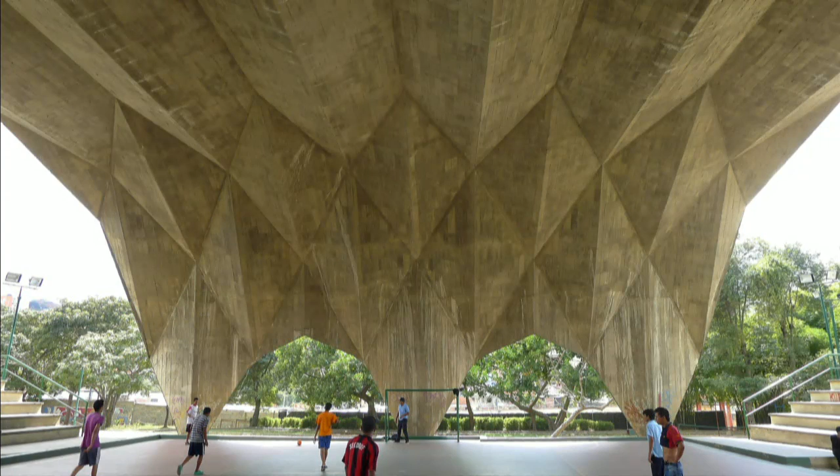So, that was my title for today. It actually comes from a very particular experience we got involved with.

Richard got a visit from the ex-mayor of London, Ken Livingstone, who said, you have to go over to Caracas. And Richard's sort of in the business of, any difficult project, pass it over to me. He said, you've got to go over to Caracas. So I went over to Caracas and met the mayor.

That's Caracas. That's the coast where you land at the top. You can see the airport, Maiquetía. And then you've got this incredible range of mountains that goes to, I think, 2,000 meters plus. So you drive up this extraordinary highway, and then you drop down into this chaotic city where 70% of the population are living in informal settlements. And the biggest ones have 900,000 people living on a hill.

And we went to see the mayor, and he had this idea. He wanted us to build a bus station. Seemed fine—they needed a bus station.

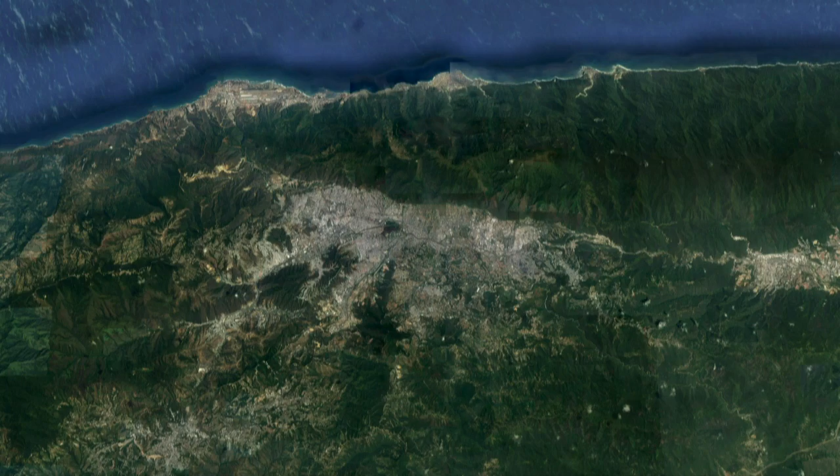The full story is, as we were leaving, having talked about it a little, he said, well, I'm just off to a meeting, one of the Chavista kind of meetings. I said I'd like to go. He said that's fine, but we're going by motorcycle. I said I had a scooter in Madrid, thought that's fine too.

Although the engineer I was with had never been on a motorcycle in his life. But you don't drive it, you ride piggyback—as they say in Spanish, like a packet. You arrive on behind the driver.

So we went off to this meeting, into this enormous auditorium they were about to renovate by Villanueva, up in a neighborhood called the 23rd of January, a sort of Le Corbusian development. I had a tie on and a suit, and I quickly realized walking in—it's all women, just about, all in red t-shirts with that fist symbol on them. I was trying to get my tie off and slip it into my pocket.

The meeting ended—this has nothing to do with the lecture, by the way—with the mayor doing a fantastic, impassioned, very articulate speech about the power of urbanism, and presenting us in the front row: 'these gentlemen, estes señores, are here to help us improve Caracas.'

And then they all get up and start singing, and it's 'hasta la muerte'—to the death. I turned to the engineer, who was Spanish, and said, look, don't worry, that bit, the hasta la muerte, is not in the contract.

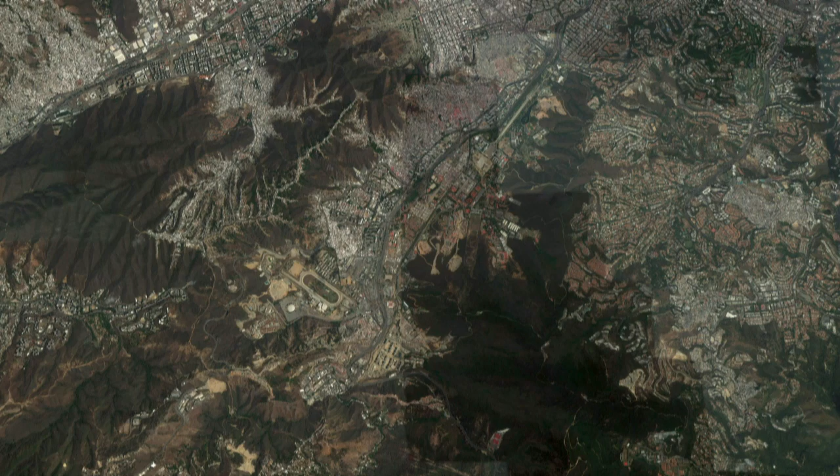So we drove out and looked around and said, well, you can put the bus station anywhere here, anywhere in this area. And there you can see the existing structures.

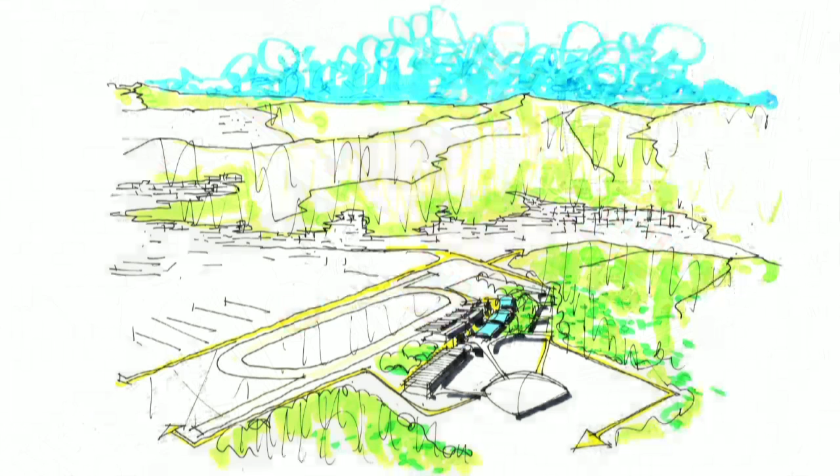We went back with a sketch—this isn't the sketch, I haven't quite found it, but it's very similar—where we did a quick sketch and said, listen, we can put the bus station here, but what we think you should do is make a park, protect this green space, because in 20 or 50 years this will be a major important park for the city, because by and large it's avoided invasion. The mayor took this and apparently went to Chavez. There's absolutely—we can talk about the politics in a little while, it's worth talking about—but apparently the message that came back was, yes, we must protect the views of the sky in the sketch. I'm thinking, crikey, either that's really clever, or completely crazy.

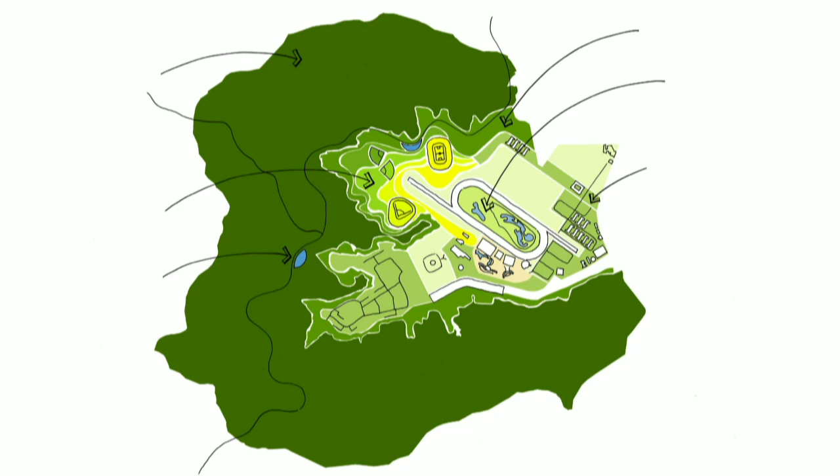So we developed a master plan which was like a series of almost orange skins, where we protected the hillsides up to the ridge line—doing almost nothing up there—and then as you got closer and closer to the centre, there were more and more interventions.

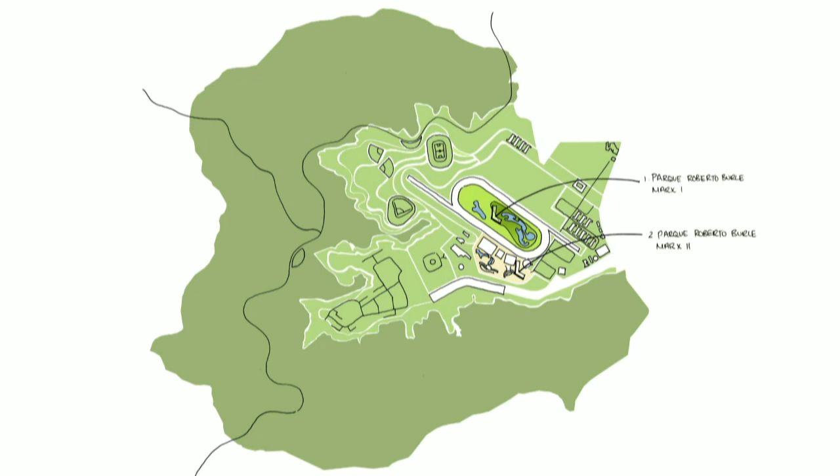Basically, a series of drawings, series of presentations, where we situated the bus station. They later wanted some stadiums, and picking up on the local political jargon, we described it as 3 axes - education, sport, and transportation, los tres ejes. The idea was the bus station met at the intersection of those 3 things.

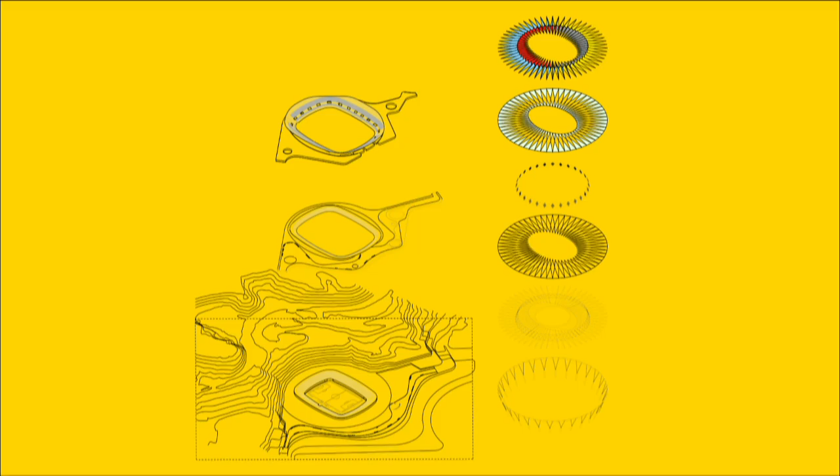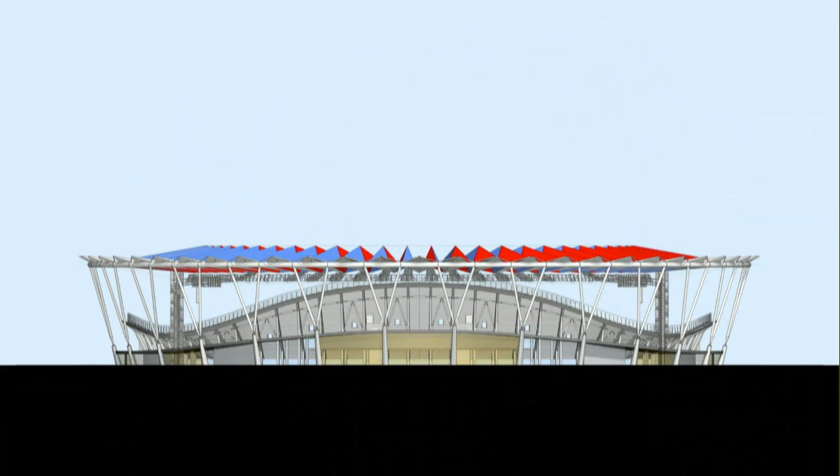Along the way, they asked us to do a football stadium, which we did - a very beautiful football stadium with a roof inspired by local artists. And that's just some of the drawings and models of that.

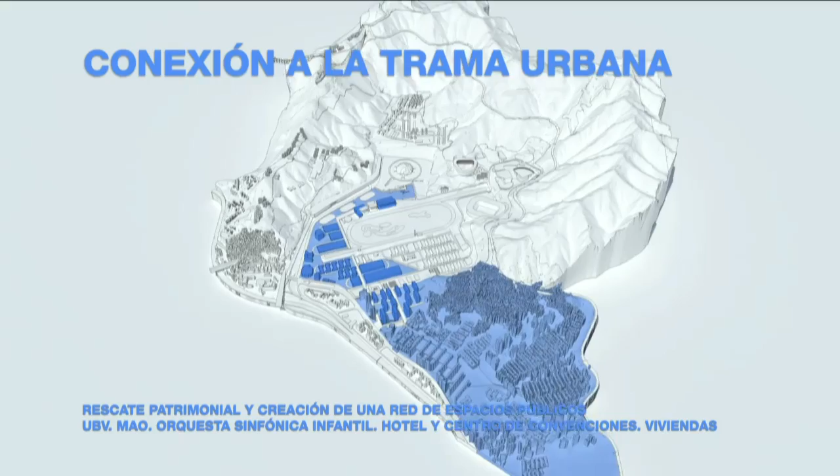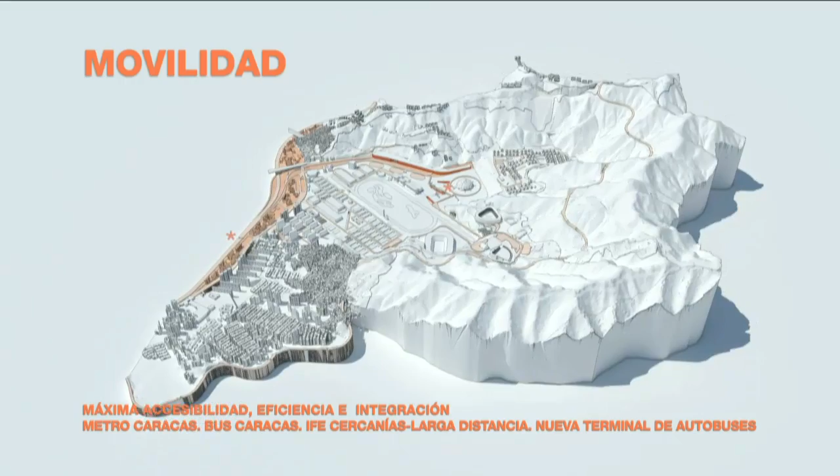This is a little video we did to describe those components. That was the educational axis, which is all the blue buildings, where they were converting a lot of the buildings they built for the race course to educational uses. They've got a kind of equivalent of Open University.

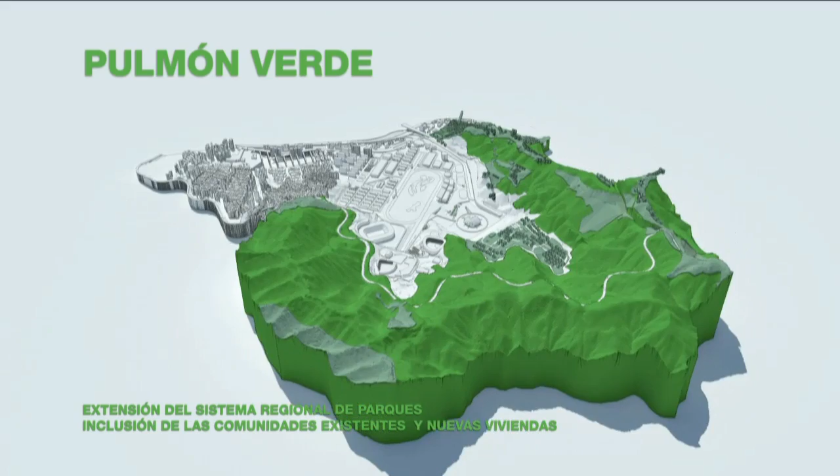Protecting the green space, because obviously the topography is pretty spectacular. Anyway, I'll go on to the next slide, and then I'll explain this video when we've finished.

I'm sorry about the resolution, but the music - I have a better resolution if it doesn't have the music, and I prefer the music to better resolution.

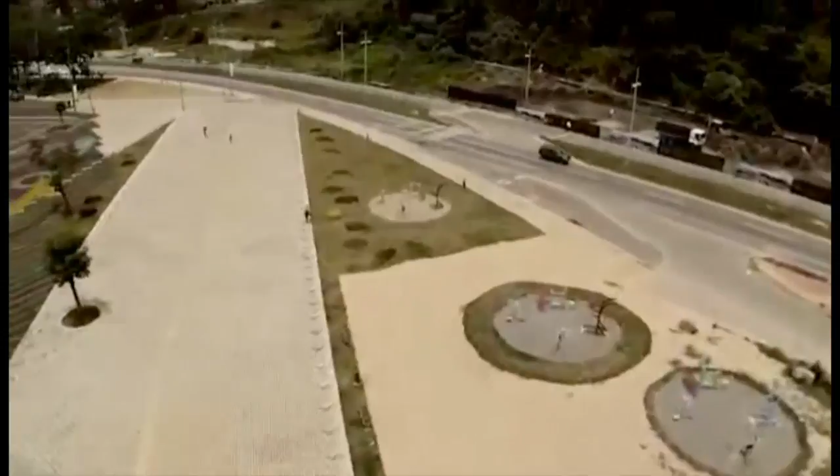I should say, any emails I ever send out from the office, I never put the words Hugo Chavez on, knowing that Homeland Security will forever forbid me from entering the US.

It doesn't seem much, that video, nor do these photographs seem very much.

But when we got these videos - because in the interim, the Venezuelan economy has obviously gone horribly wrong, Chavez had died, Maduro had come with all the consequences that seem to have flowed from that - and we weren't working on the project anymore. But when we got these pictures as a team, people were almost crying, because the project was very ambitious. We thought it was fantastic in many ways.

But it seemed to us that what they'd done meant more than many other urban design projects we'd achieved, because they'd taken the master plan and just gone on and got on with bits. So the pictures you see, for example, of the plants, are actually nurseries they've established up in the poor neighborhoods - given the power to the women, and they've grown the plants, and taken the children and planted the plants down in the park.

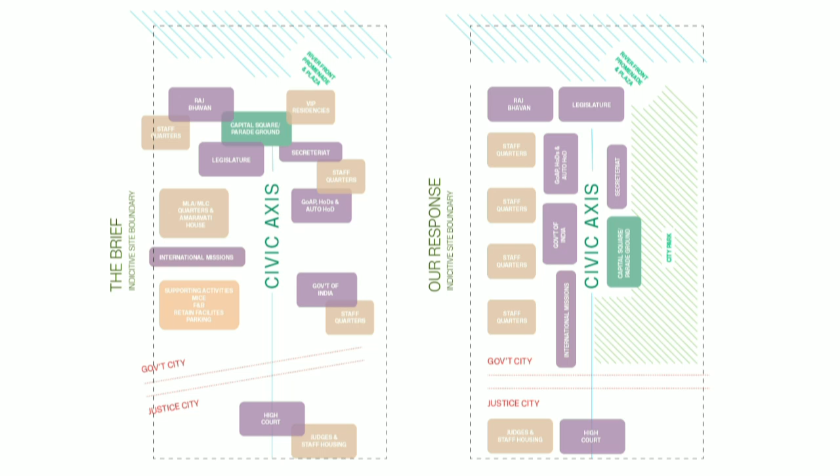Our first move was to say, well, we're going to get rid of that kind of imperialist nonsense, and we're going to make it asymmetrical, putting the buildings on one side and a public space on the other. So you immediately create two things: an accessible space, which rather than an internalized park only for people involved in government, but also becomes a public park. And you start to address this question of how you make the Indian democratic process as transparent and inclusive as possible. That was a theme running through all of this.

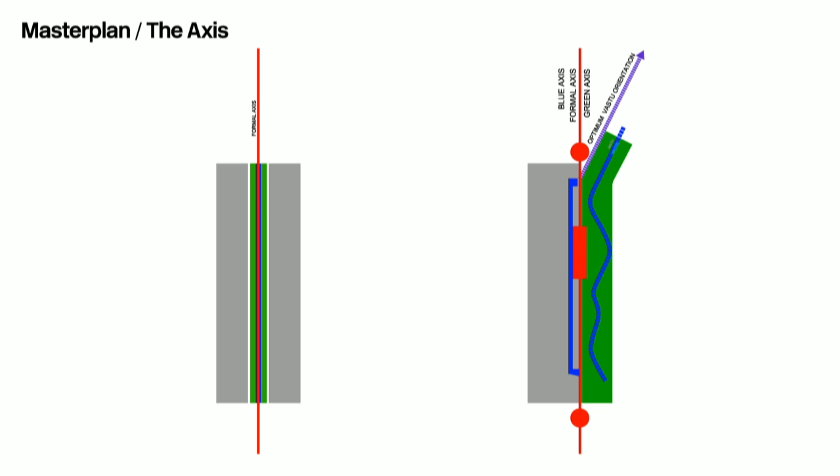So that was the basic master plan. There are some interesting symbolic issues we had to address, to do with religious symbolism of axes and so on. As I say, you're always working to a different set of rules. But in a sense, that was the master plan.

This sat in a slightly strange master plan. That was the master plan for this government complex, which itself sat within a wider master plan for a whole new city, much like Chandigarh was an entirely new city. What's interesting for us is the inheritance of the Raj, that all of those buildings you can see on the right are either the three key symbolic buildings, the administrative buildings, or the housing. It's in itself a huge construction project, and as you can see, it sits on the edge of a rather beautiful river.

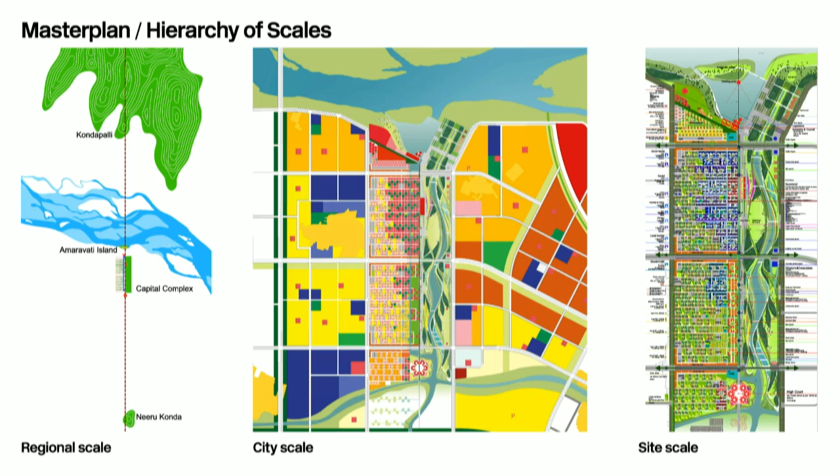So I'll just flash through these, but you can see from the titles the sort of general direction we were going.

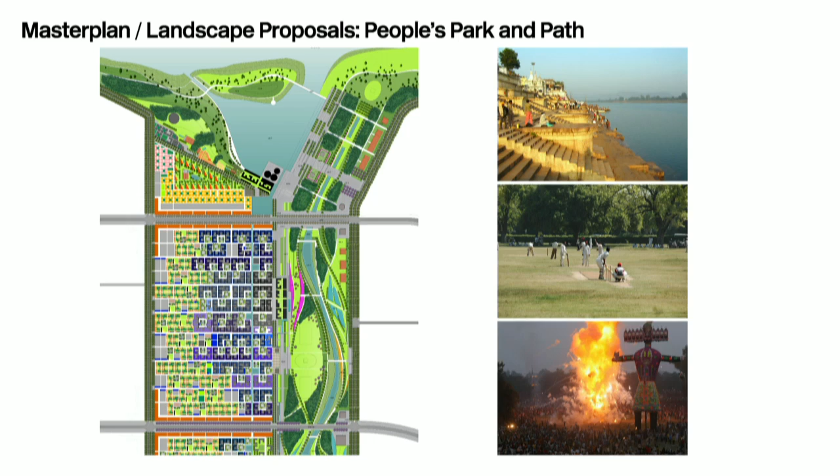We were very much looking for a language we felt was appropriate for the culture, and right down to the architecture, where somehow colour and art and so on could enter into the architecture. And obviously, all the festivals are an incredibly important part of the culture.

So the notion of a people's path and the park alongside it, with a series of public spaces that allow you to celebrate those activities, was very important.

It was an overwhelming master plan. I mean, I should say our excuse for not winning was partly we were literally overwhelmed by the task, being not a particularly big office, because it required you to do the whole master plan, as you can see, which is a sizable piece in itself, but also design the three key buildings, one being the High Court building.

In the middle is the Secretariat, and at the top, right at the top of the axis, the Legislature building. So you had to do those in some detail.

The other aspect, and I think you can begin to see this, we were creating a master plan which actually was quite low buildings, quite narrow streets, no emphasis on vehicular access.

So the parking was always, access of cars was always restricted through into the block, with parking quite carefully constrained to what is the left-hand side of your screen, so that it encouraged as you moved into the scheme, it encouraged basically pedestrian movement.

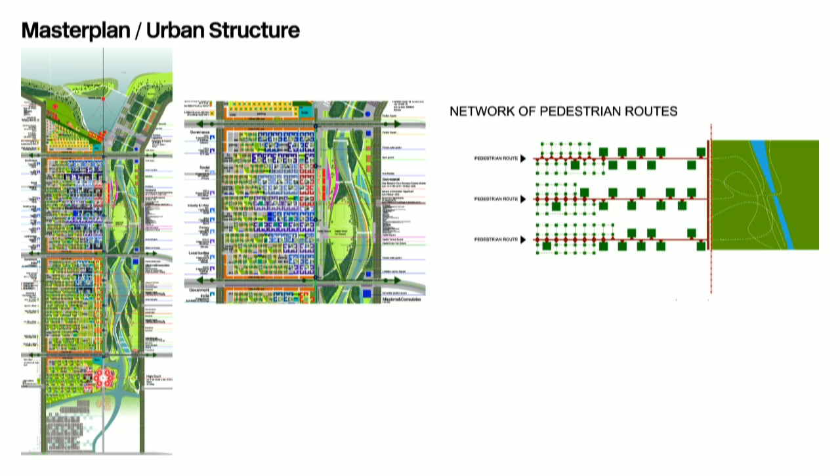So, you know, at the moment, the judge kind of lives and then gets in a car and drives 3 miles to the High Court. It was to actually come up with quite a revolutionary take on what a modern city might be.

And we knew when we were doing this, you're running the risk of them saying, but you've just given me a bit of old-fashioned India. I want, you know, Western iconic buildings.

So there was a lot of work on making all of that work in terms of all the functional requirements. Incredible brief to fit in, which took one person 2 months to figure out what the brief actually was.

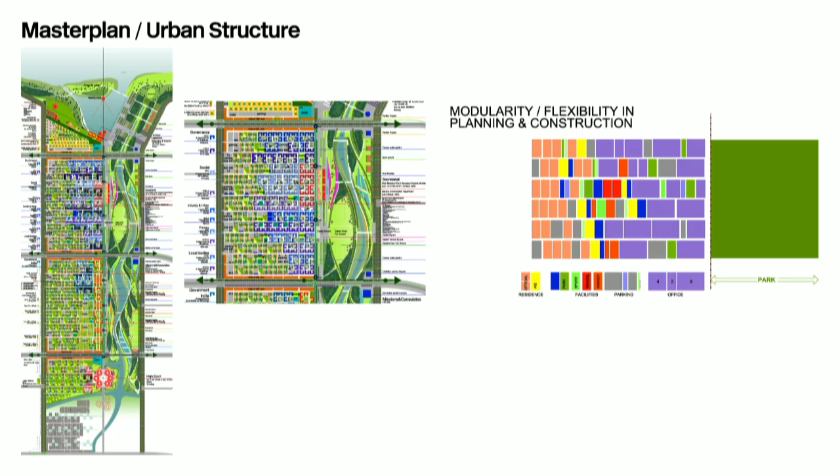Finding enough flexibility in that program so that it could grow with time and different grains of movement. Hierarchy of public spaces all the way through.

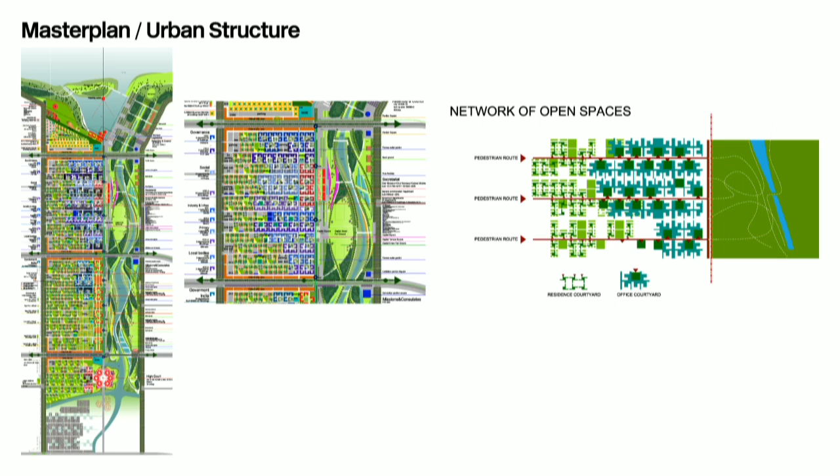On this side, you see actually quite small private gardens, through to courtyards related to the administrative buildings, through to the People's Path down the centre, and then the People's Park on the right-hand side.

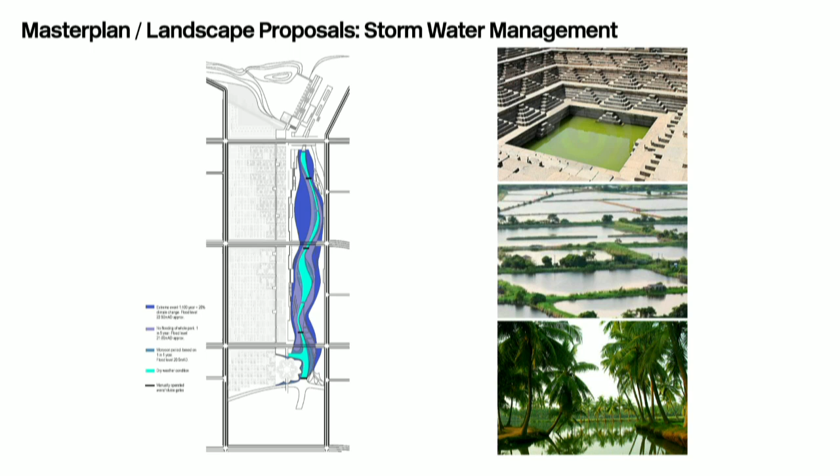And then, of course, the design of the public space, bearing in mind, mysteriously, the site they picked for this is a serious floodplain. So you're actually building buildings out of that floodplain, which took some understanding.

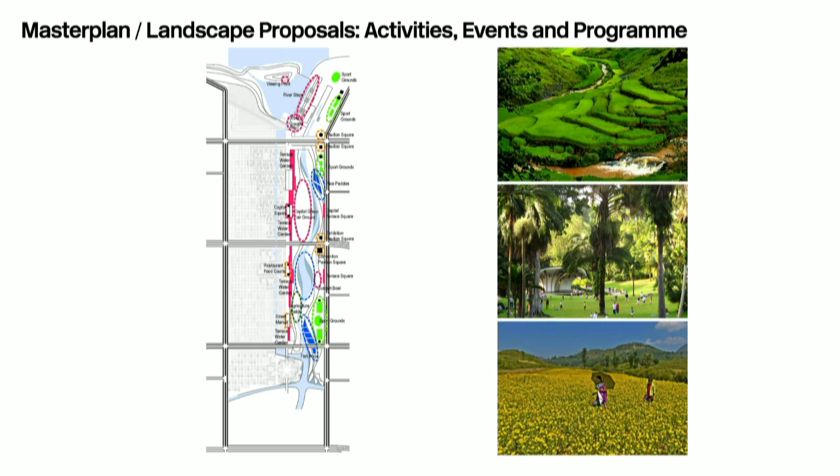Come to grips with the local plant types and so on, and equally important, pursuing a kind of low energy solution to all the buildings.

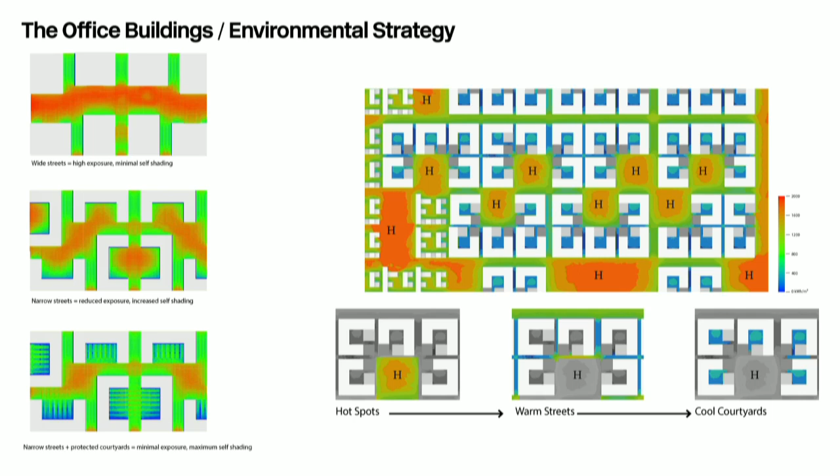So these are only interesting in the sense that this is a section of the office buildings where you're intentionally making a courtyard which is exposed to the sun, which gets hot, which drives the movement of air through the buildings. So, you know, which is slightly against your logic.

So you're tinkering with the temperature changes, because you're dealing with a master plan, you can start to create a kind of topography of temperatures which allows you to derive a climatic solution for the individual buildings, and similar approaches for the housing blocks.

So that was the master plan. That was sort of part one of the project. The second one was to go through these 3 court buildings and the courtrooms.

I mean, again, each of them, I think, overwhelmed by the scale, because I can't remember exactly how many, but it's 3 by 15 courtyards. So it's courtrooms. So it's a huge, huge building.

You know, when you think of Chandigarh, I think it's probably about 8 courts from memory, and that's serving 2 states.

So, you know, again, how do you, on the one hand, we've got this idea we want to make this process transparent, but then also accessible, but also how do you take this number of courtyards and group it together in a sense that you can find your way, and it can be serviced, and the judges can get through, and the prisoners can get their route, and the public can get their route.

So each of them presented a particular set of challenges.

In this instance, a very simple notion - going back to that first sheet, it describes the basic move for each of the buildings. The People's Path, this access that connects all these buildings, purposefully goes through the middle of the court. It's a bit like Antwerp, where the street continues into the building at the end. So here we took the public street right the way through the building.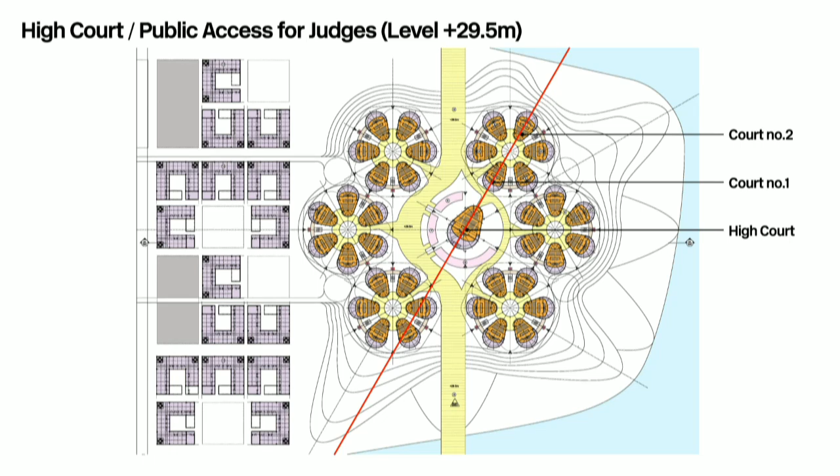Going back to the previous slide, which had these in the wrong order - the circulation routes from all the legal administrative buildings go through underneath to a lower level, giving access, both vehicular and pedestrian, for all the judges and so on. So you're working on two levels, but there's always a degree of transparency between those two levels.

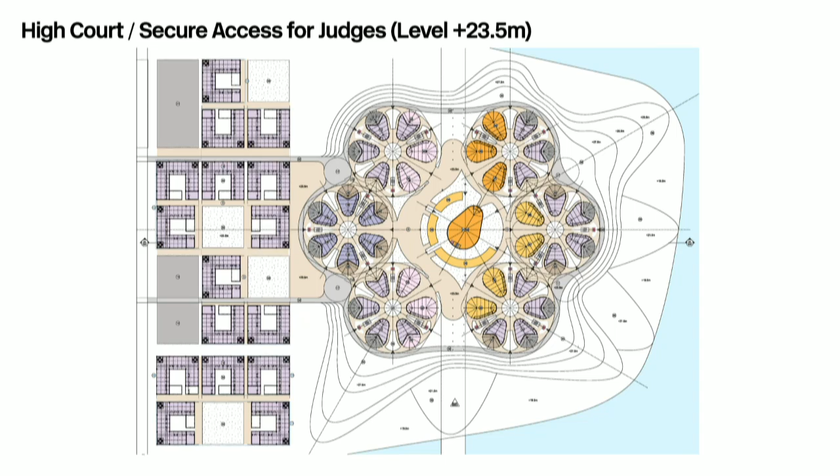Again, in each of them, an environmental approach that's pretty much common to all three buildings: an outer skin that keeps the heat off, and then an inner set of volumes, with each of the spaces treated beneath that protective skin.

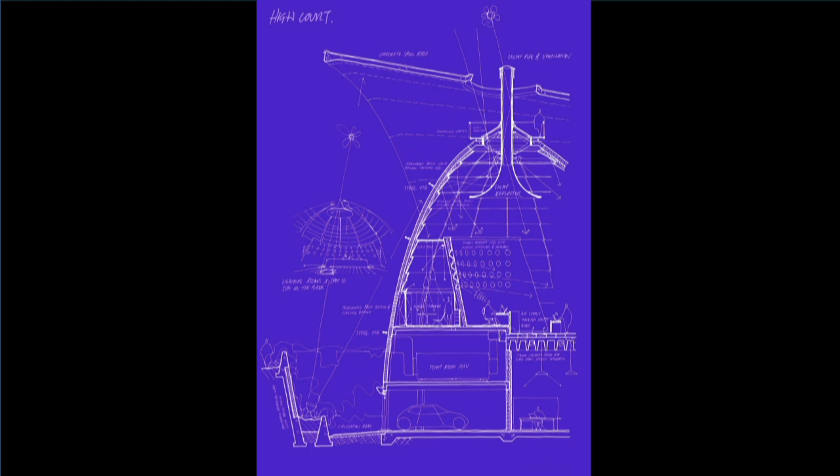So you can see construction drawings and models, which gives you a clue of the overall structure of how we described each of these buildings.

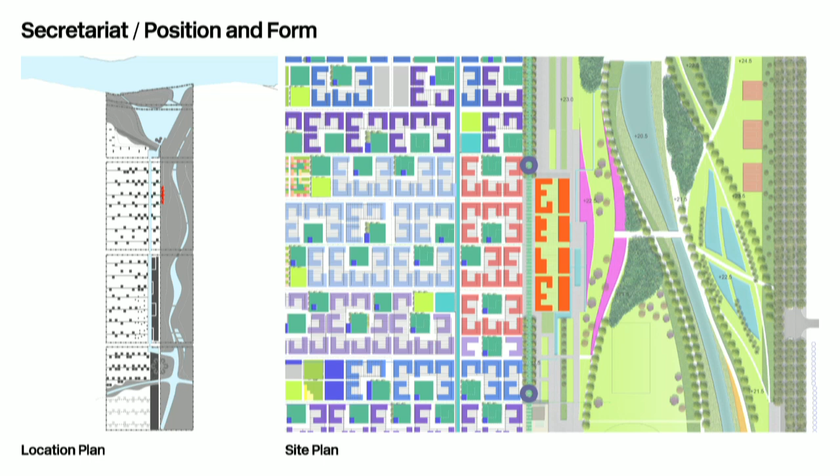In the case of the Secretariat building, the Secretariat sits on one side of the axis, with the administration building sitting on the other side, without that underground connection. So all the administrators have to leave their office, walk down to the street - they can't get in a car - they have to walk across the pedestrian street to go into the Secretariat building.

It's a very intentional move to create this point where Indian administration and justice, which has its reputation for corruption, is somehow made much more aware of the people on whose behalf they're administering or ruling.

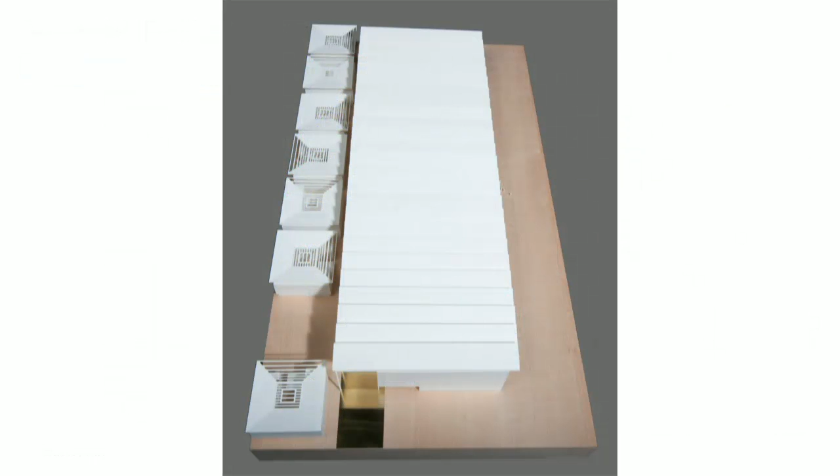In this case, the notion was that the roof actually also covers that route, creating a kind of loggia, which in itself encourages occupation - and that's what you can see on the left-hand side.

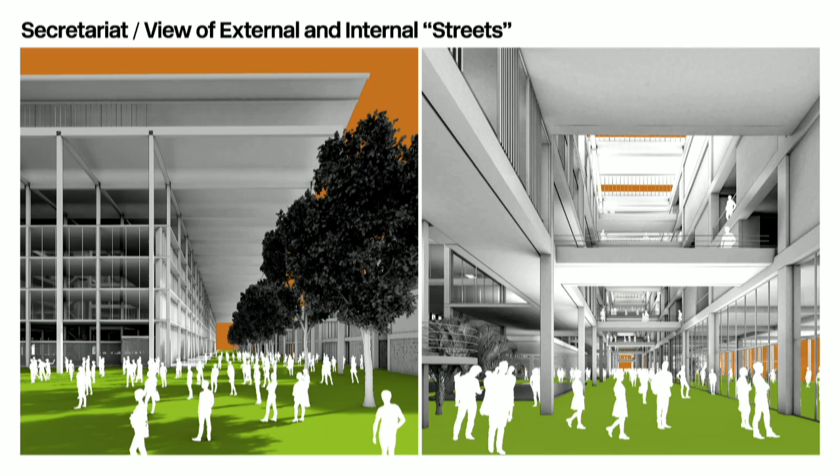Inside there's a sort of repeat of that idea of a route, because there is some degree of public access to committee rooms and so on, which takes place at the lower level with its own internal route.

The legislative building, the last of the three buildings we had to look at, explores things in a slightly different way. It has a kind of symbolic position at the end of the route - you see it down the route, but just before you get to the building, the route veers off.

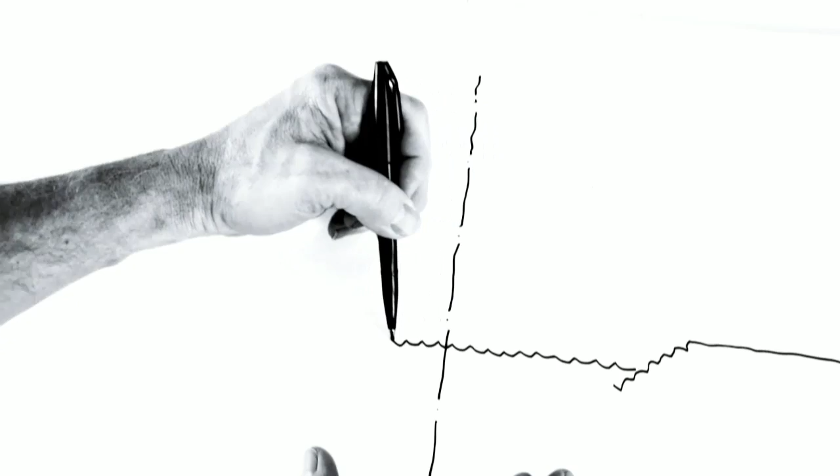In the wider master plan, the route joins a river walk along the river, given the importance water has to life and everything else, but then creates basically the equivalent of a gate, which overlooks the main public space of that building. I'll explain that in a little - I think this video explains that.

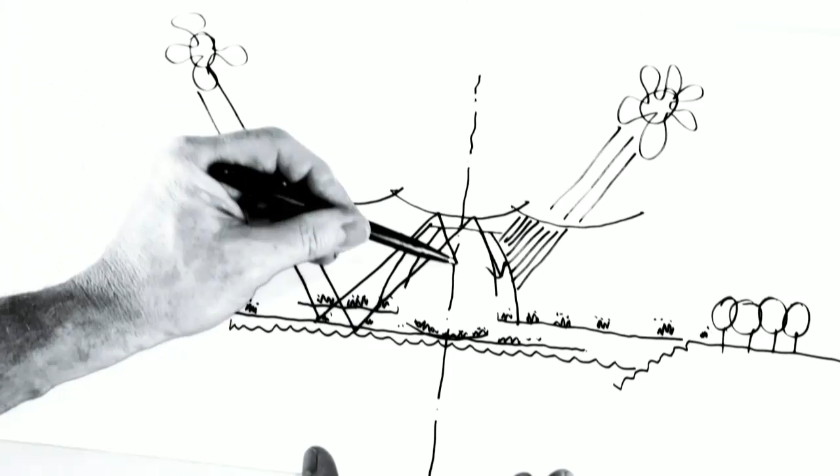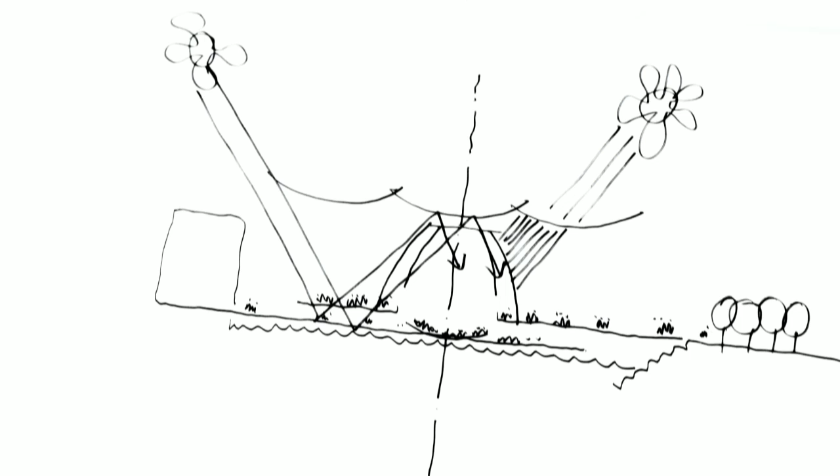So you've got again a two-level arrangement, with the legislators on the level below, and public access given to the upper level from the gate. You can go in and, like in Wales, see into the legislative buildings, or meet your politician at that level, but in full view - your meeting areas are in full view. Or if you don't have permission to enter the buildings, you can just sit on the gate and watch this activity going on.

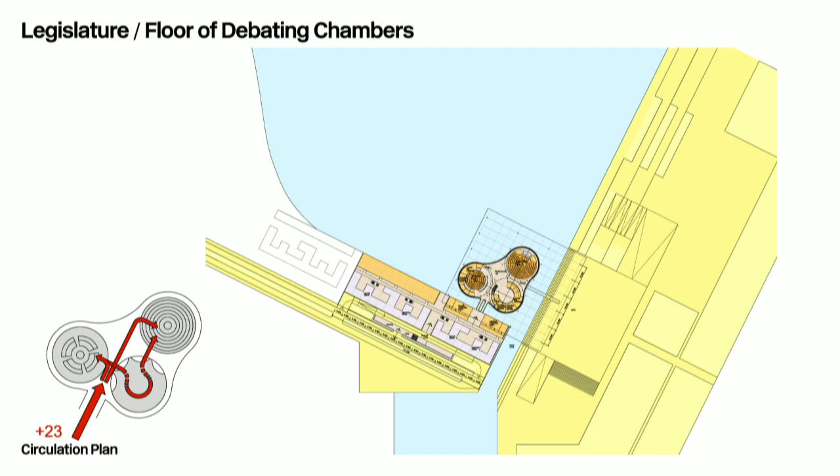Then a series of plans describe all the different routes you've got to achieve to meet the brief, all the areas - again the same notion of a big roof covering the space, protecting it from solar gain and rain.

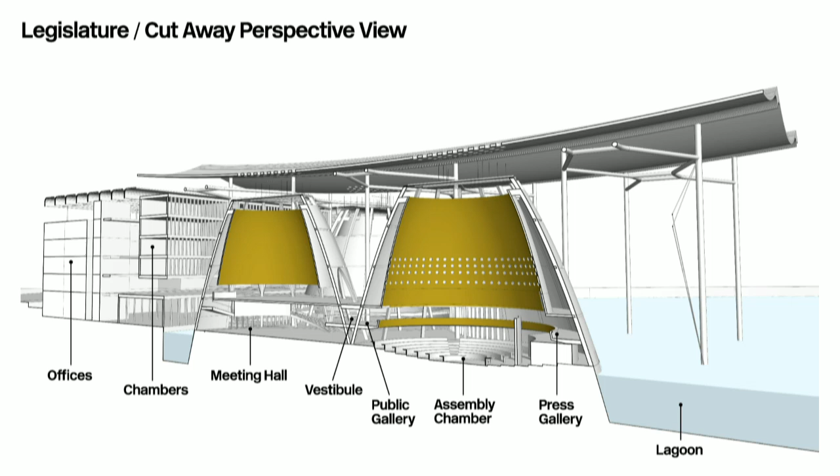But in this instance, the underside of that roof was reflective, so even when you're sitting in the chamber, through the reflection you're aware of the outside world - you can never escape the sense that the public is out there somewhere.

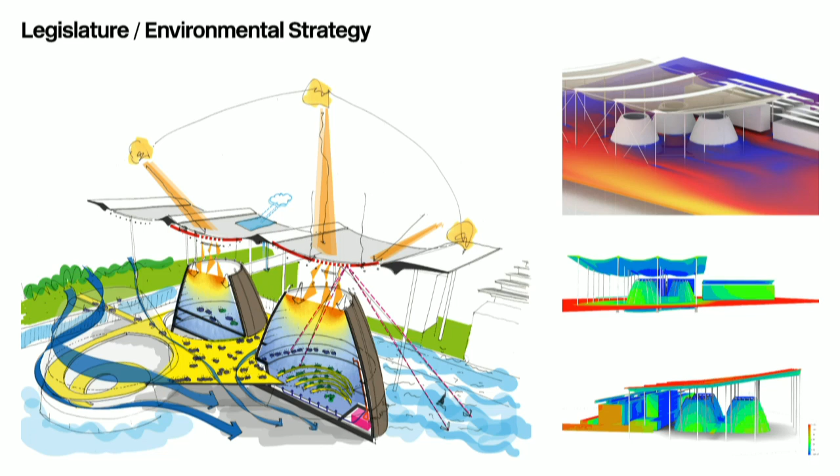All the environmental studies to try and make sure that it's as naturally ventilated as possible, and so on and so forth. Models.

You can see that what the others gave them was, as it were, a Western image of what a modern capital should look like, and certainly didn't address, I don't think, the central issue of how you make government accountable to the electorate in what is the world's most extraordinary democratic experiment. You've got a huge population voting, with all the logistics, and it works and it doesn't work. It's an amazing event in an amazing culture.

So we lost the competition. Very sad, very disappointing. Lots of people in the office worked incredibly hard on the project. But as it turns out, this is the really sad bit.